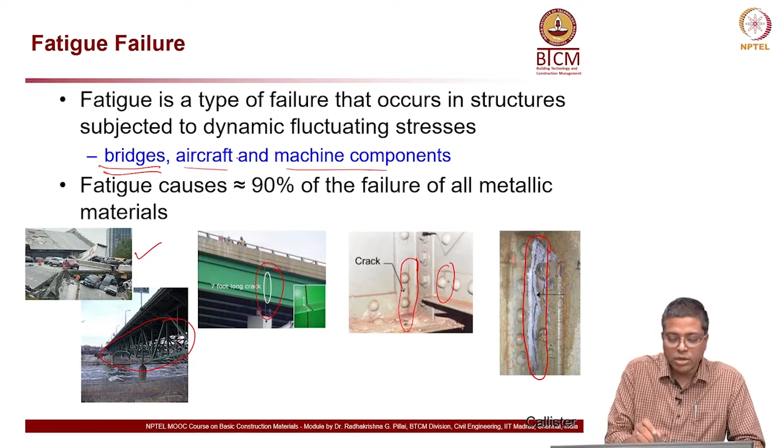And you can see another example where there is a 7-foot long crack on a bridge, you can see here. Okay. It is a steel girder. Here also you can see another crack on the steel members, and here is another crack which you can see on the steel member. So, there are many steel bridges which are vulnerable to fatigue failure. And also other industries, when we look at aircraft, machine components, all those also experience severe fatigue related distresses.

Now, what are these loads where we just talked about variation in the stress from compression to tension, tension to compression? In general, we can classify them as 3 types of cyclic loading. One is reversed stress cycle, where you can see the first graph on the top, where it is symmetric in nature along this axis. So, it is symmetric in nature, and that means this height is the same as this height here. Okay, the amplitude is the same both for compression and tension. You can see above the graph it is tension, and then here it is compression.

Okay. Now, for the next case, repeated stress cycle, here it is not necessarily symmetric like the above case. You can see the graph center line is here, or the zero stress line is here, and then you have compression here and tension. So, you have more tension in this particular case than the compression.

So, that is another case, and the third case is random stress cycle, which is probably the most common in case of civil engineering structures. Okay, because most of our loads are not well defined. If you are talking about a bridge, you cannot really well define the actual load which is coming on to this particular truss element, because that depends on the type of vehicles, the weight on the vehicle, many factors play a role on that.

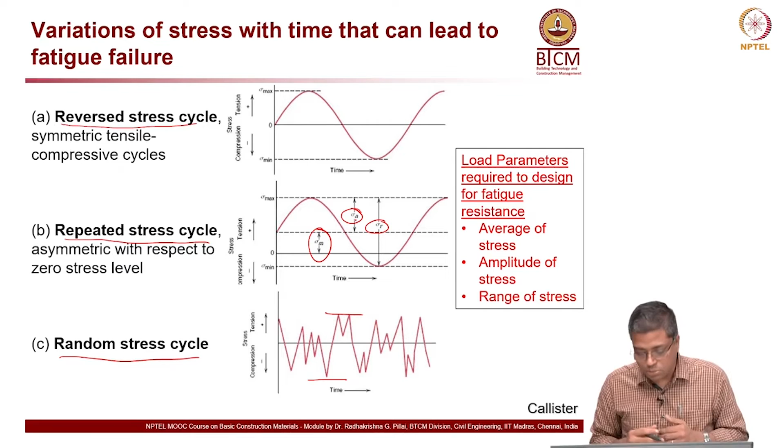So, here in the second case I will show you what is the average. So, this is the average line here, okay, and this is the amplitude for the compression, and then this is the total range of the maximum compression and maximum tension. So, all these parameters can be used to design the structures.

Now, let us see what is the mechanism which is happening when you talk about fatigue failure. So, you can see on the top right I replotted the same graph which we used earlier.

So, assume that this is the stress strain graph, and then fatigue failure can happen at a lower stress level than the actual ultimate tensile strength or compressive strength of the material. Now, you can see here, under fluctuating stresses, it is possible for a failure to occur at a stress level lower than the tensile or yield strength for the static load.

We are focusing on tensile strength here. So, this can happen at this condition here. That means, even if the stress is much below the ultimate, somewhere here. So, at only 35 to 60 percent of the load, there is a possibility of fatigue failure to occur, especially in case of typical steel.

Now, fatigue failure is brittle in nature. Steel, you can say it is a ductile material, but still when it fails, it can fail in a brittle nature. Here I am showing an example of an aluminum piece which is highly ductile as compared to steel, but still this aluminum piece, broken by fatigue mode, you can see that there is no real flow of the material here, and it just broke into 2 pieces without really deforming like in the usual case. The necking and all that is not happening here.

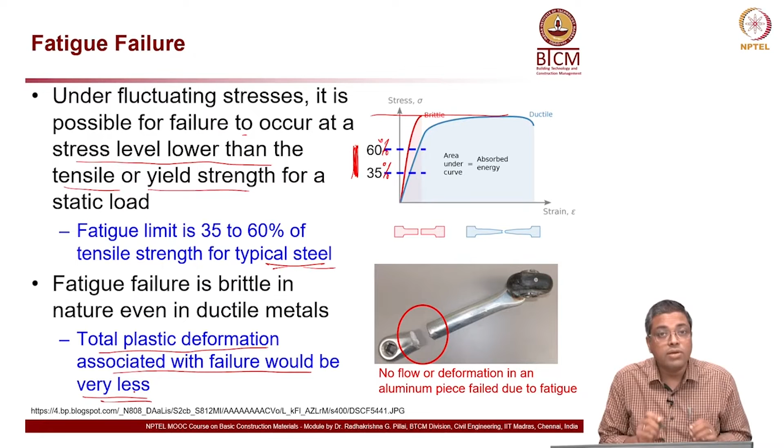If the same aluminum piece is pulled in a tensile strength test, you might probably see necking and then cup and cone failure, but here you are not seeing that. This is because it is a fatigue induced failure. So, the total plastic deformation associated with the failure would be very, very less, even if the material is ductile in nature.

Now, how does the fatigue failure happen? There are 3 stages for this. Stage 1, crack initiation, that is this here, it happens right here. And then stage 2 is crack propagation, which happens for up to this much distance, and then the remaining portion is stage 3, or the final failure.

Now, if you look at the time taken for all these, initiation, of course, just happens when there is a small crack, but the crack propagation period will be very long as compared to both the first and third case. You will have several cycles to undergo; all these lines over here indicate cycles of cyclic loading, which could be in millions. Here it is demonstrated as easy-to-see lines, but there could be millions of cycles or millions of those crack propagation steps.

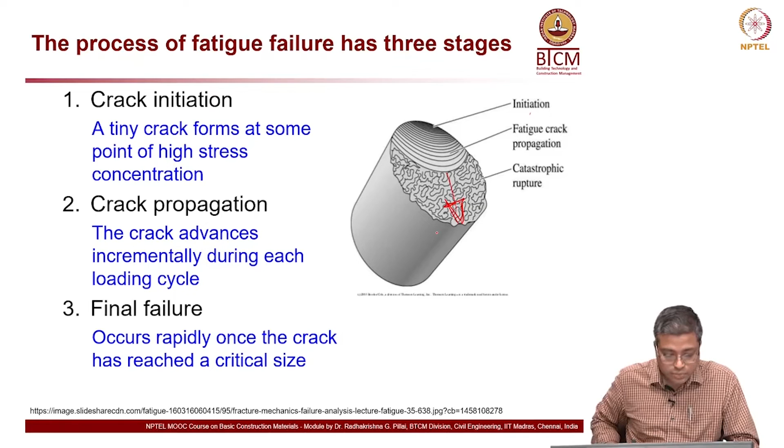And then once it reaches some threshold level, the remaining material fails all of a sudden. This happens very quickly. So, that is the final failure, the third step. Here is an example for that. You can say this initial crack happened here, and then here you have the propagation phase, and then from here onwards it is all of a sudden the final phase.

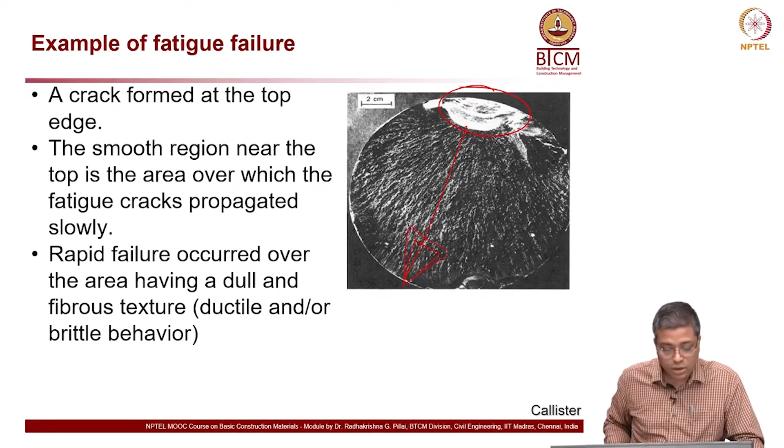So, the smooth region you can see on the top, this region here is the initiation and propagation region, and then this is the third phase here, the darker color region. Now, if you look through a microscope, you can see the same pattern. You see this pattern over here, and here also you can see striations depending on the microstructure and the type of loading which the material is experiencing. You can see a lot of these narrow small lines here. That indicates each loading cycle, or a small propagation of the failure under each loading cycle.

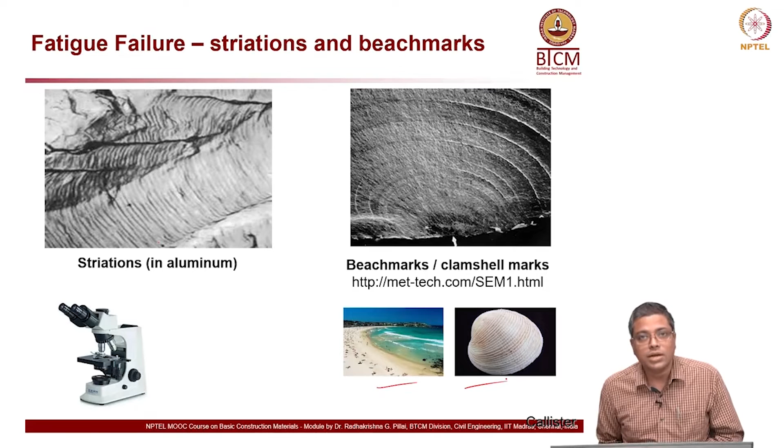And they also call it beach marks or clamshell marks because it looks similar to that. So, you can see here. Anyway, in a microscope, you can probably see the millions of cycles, the evidence that it does not happen in just a few cycles of loading.

Now, how do we take care of this problem in our design? When we design structural systems, knowing that there will be cyclic loading, how do we handle that? So, there is something called the SN curve. S stands for the stress amplitude and N stands for the number of cycles until failure. Now, you can see two curves here, one is a red curve and another one is a blue curve.

The red curve is for most non-ferrous materials and the dark blue one for the ferrous or titanium alloys. So, let us first discuss the ferrous or titanium alloys and then we will go to the non-ferrous materials. Some ferrous and titanium alloys' curves become horizontal at higher N values; the more the cycles, it becomes horizontal.

You can see this here, this graph over here, it is more or less horizontal after about 10 to the power of 6 cycles. So, from here it is horizontal. Now, that is a very good property which the ferrous or titanium alloys have. That limit or the corresponding stress value SE, which I am calling the endurance limit or the fatigue limit, is a stress below which failure due to fatigue will not occur.

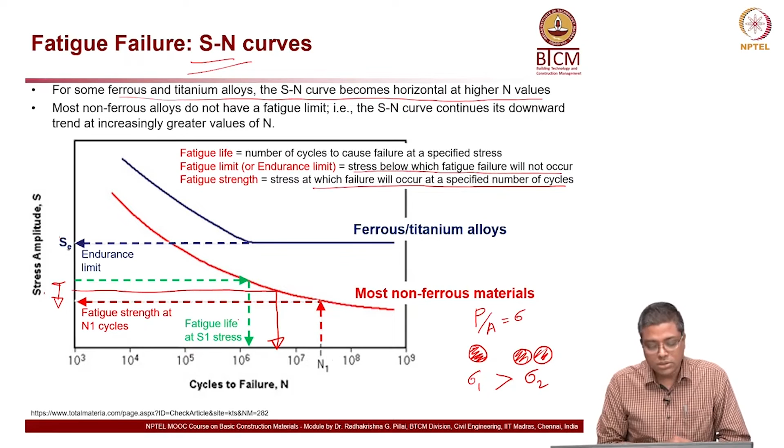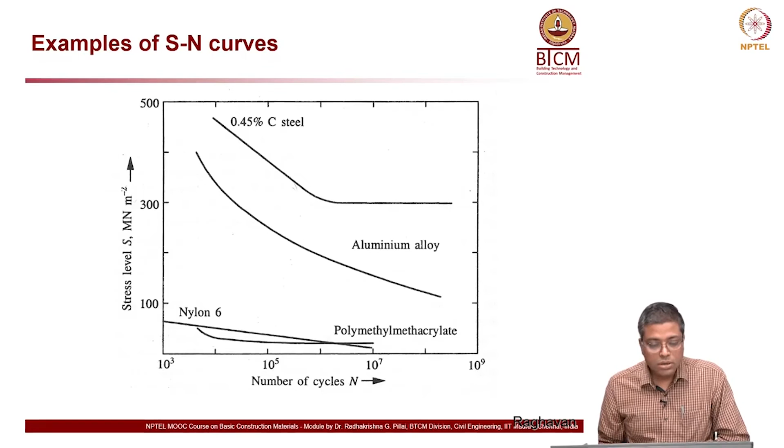So, how do we handle this variability in the test results? We can look at the variation at every point and then draw some probability based curves. I am going to show you that in the next slide. So, probability based curve. For example, here I can say this is probably the mean value, and then the graph is going something like this. That is what I draw here. So, there is a mean value associated with the data and then also the probability or the scatter.

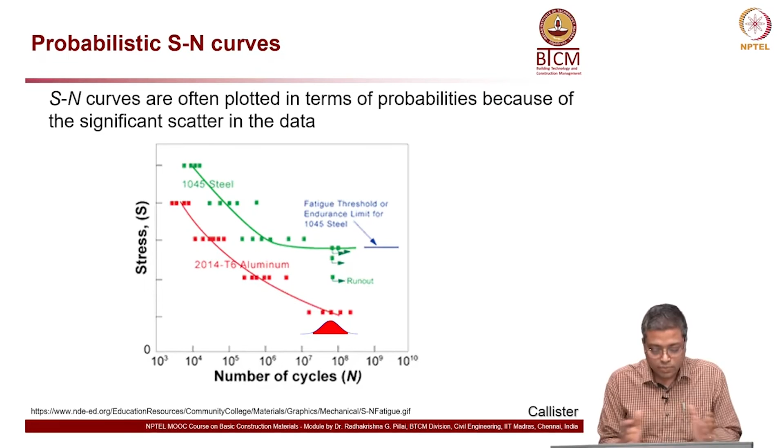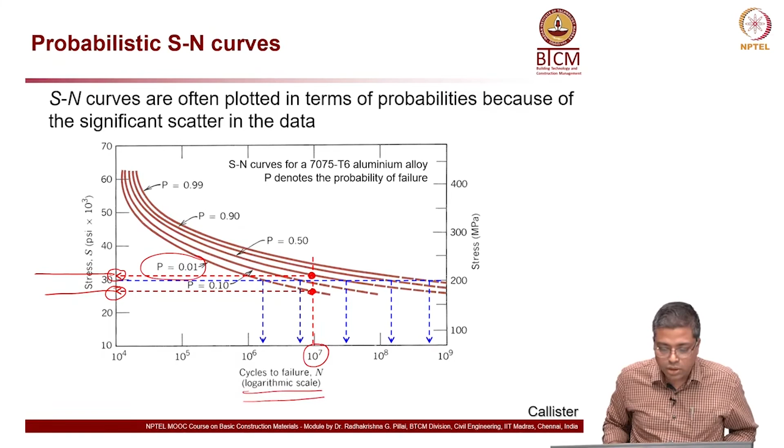One thing to note is on the horizontal axis you have logarithmic scale, forgot to tell you earlier. Okay. Now, when you talk about this variability and all that, I think it is also important to know the difference between standard deviation and coefficient of variation. Average, you know that average is mu, which is sum of all the values divided by the number of values, and also standard deviation you have sigma. Now, sigma, or I am going to call it SD here for simplicity, and COV is the coefficient of variation.

Now, take case 1 here and case 2 here. In case 1, let us say the average value is 100. I am going to show you here which is the more important parameter for you to consider, and why probably standard deviation is not a good parameter to consider always. So, let us say case 1, average is 100 and standard deviation is 10. What is coefficient of variation? It is 0.1, or let us say 10%.

Now, in case 2, average is 20, standard deviation is 10 and coefficient of variation is 10 divided by 20, that is 0.5. So, I can call it 50%. Now, you can see in both cases 1 and 2, standard deviation is 10, but coefficient of variation is 10 and 50. So, there is a huge difference in the coefficient of variation.

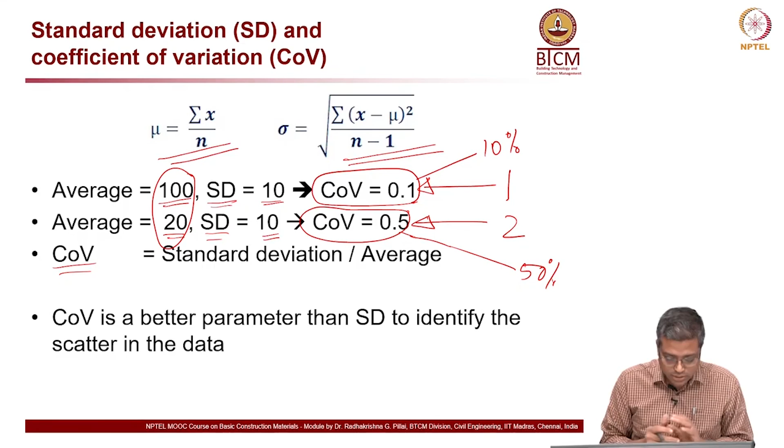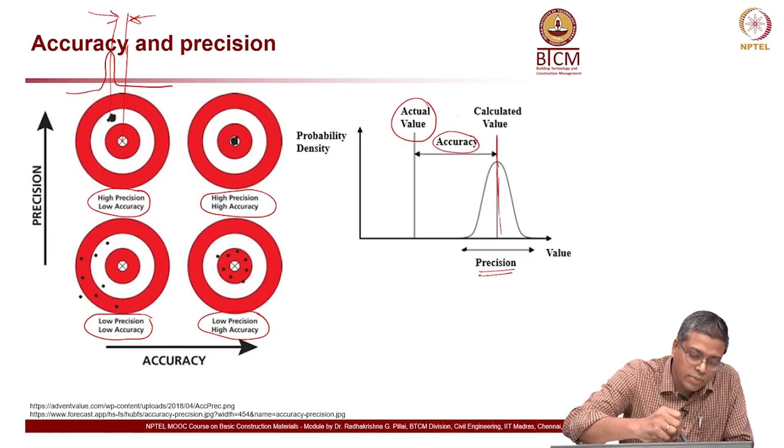So, it is not accurate, but the precision is very good, because if I draw the PDF on this, it will look something like this. So, the width of the PDF is narrow, but it is away from the true value. So, the true value is here, and this is slightly away. Okay. So, you can relate the sketch on the left and right side.